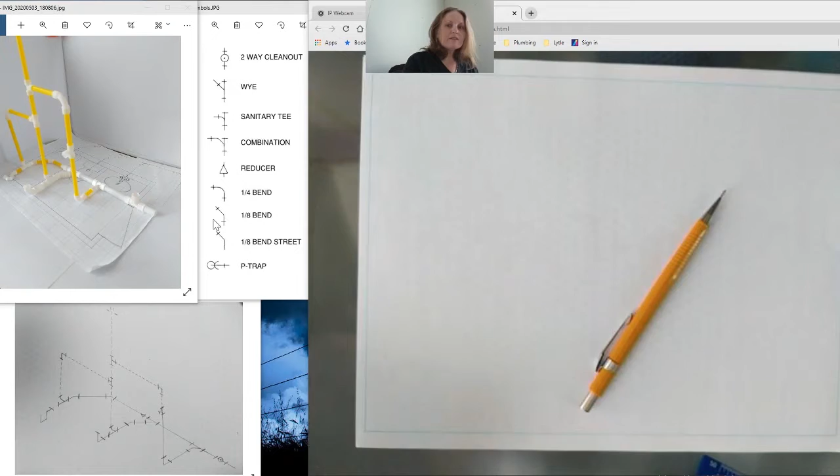And the cool part about that is they're drawn in the flat plan, but we can use them here on our isometric as well. And my isometric paper is here already. And how that makes it easy for us is with our plan in hand, we can see that the lines are in a different direction. They're slightly askew at 30 and 60 degrees, but that's okay, because then all we have to do is kind of rotate our paper, and then we know what we're going to draw.

So it looks pretty similar. So we'll rotate the first line, and then we'll just continue to rotate these branches another 30 degrees. And that's pretty much all there is to it. And then we'll just draw the vent risers in a vertical. So that's what I'm going to be sharing with you today. And you're going to be drawing it too.

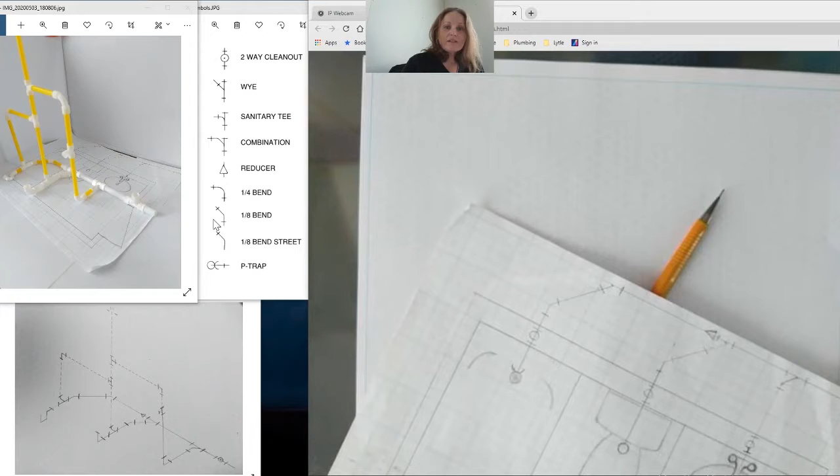So, like I did before, when we built the model, I'm going to speed it up a little bit so you don't get too bored. So I won't do a lot of talking while I draw it. And if your model's different, it's okay. And if you find that it's a little too complicated to draw what you have and you just want to draw what I have here on the screen, that's okay too. I don't mind. You can draw whatever. I want you to get the idea of how to draw it.

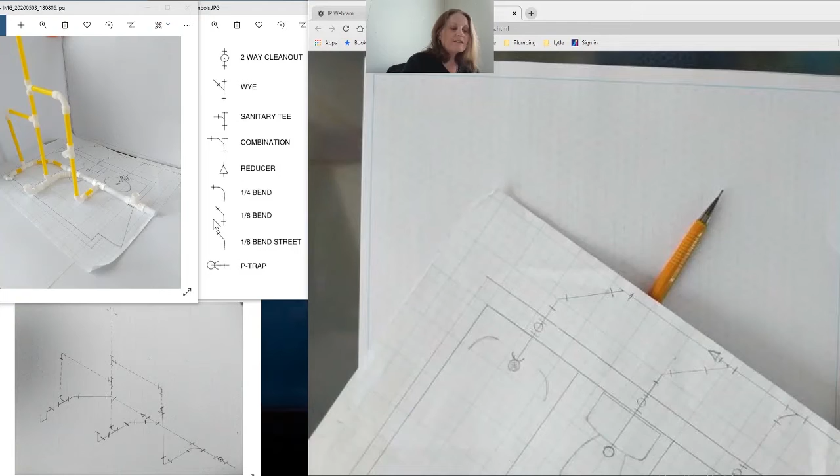So I have these on the screen here. So I'm going to go ahead and take this one out of the way. But I'm going to show you what you're going to do. Because we see this one here up on the screen is right here. This is the same drawing. So I'm going to start you out. First thing you're going to do is you're going to take your regular drawing and you're going to take a look at it and you're going to find your longest line. And then you're going to put your scale ruler on here.

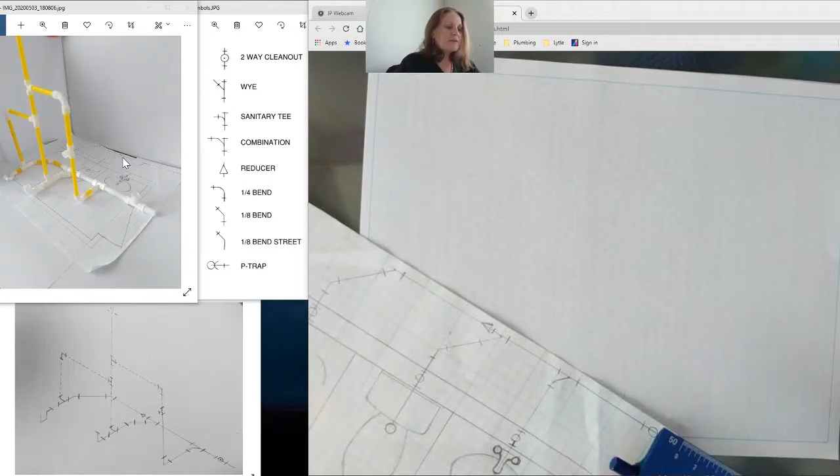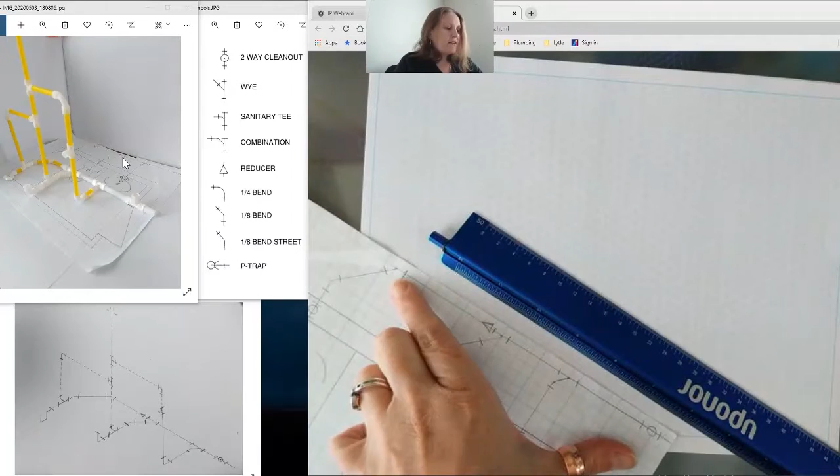Now, you're not measuring anything. This is a sketch. That's one of the key elements here. It's a sketch. So just pick a spot. And now I started from the corner. And you just start yourself out and find a spot. And you start the longest line and just, it looks about that long. And go for it. And you can see on my sketch there, it's just a rough line. So pick a spot, start from the corner, and leave yourself a little space so it doesn't run off the page. And just pick a spot and draw yourself a line.

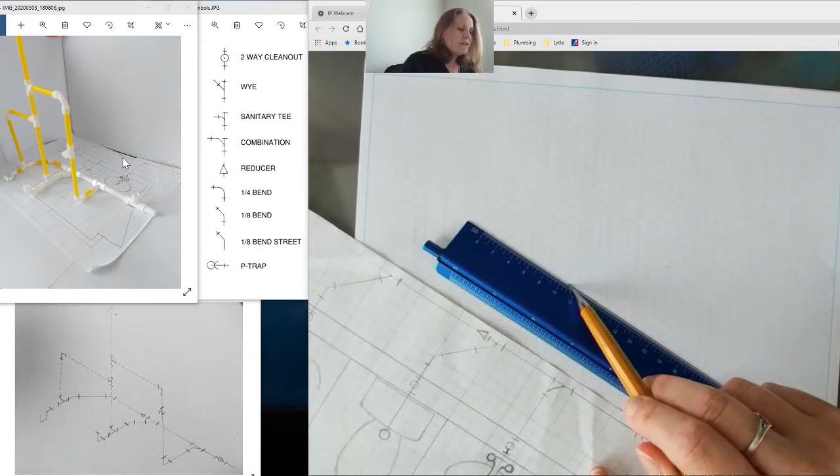And if you wanted to go that far, you can. Want to go a little further? Cool. Now I've got my main branch. So that lines up with this. And then you've got 3 off of it, but this one's got a little jog and this one's got the other turn. So what you do is you pick a spot for your first one, and then your second one, and then your third one. But it's got to go at a 45, and it's got to go to 45. So your safe bet is to start with your first one.

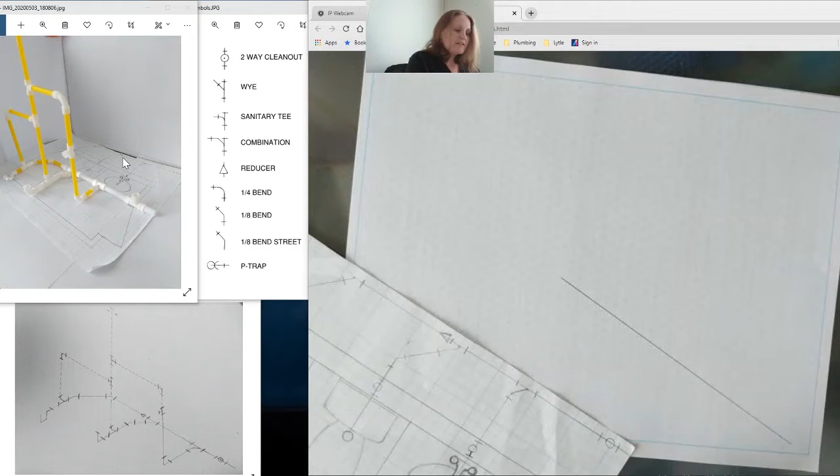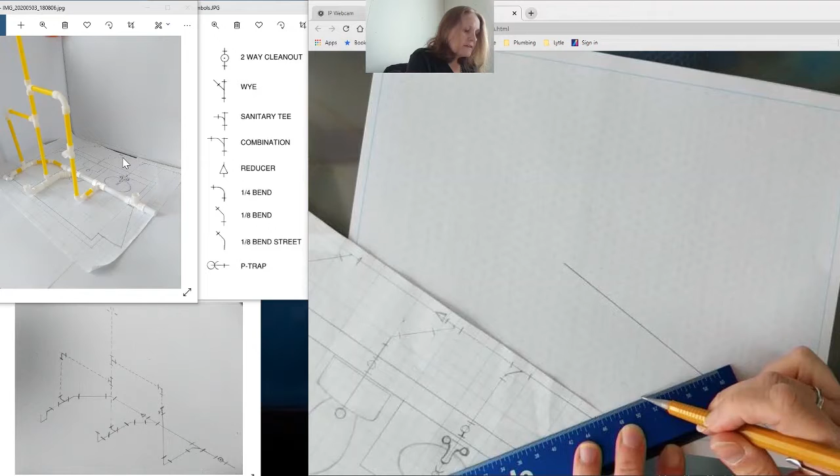So instead of going straight at it, remember I said we got to turn it. So it's already got the lines here for you. Just find you a spot, pick one, and it's your shortest one, and go right into it. So they're perpendicular here on this paper, just like they would be here. So it's your shortest one. Take it out there. That looks good. You want it to go that far, go that far. It's a sketch, guys. Do your thing.

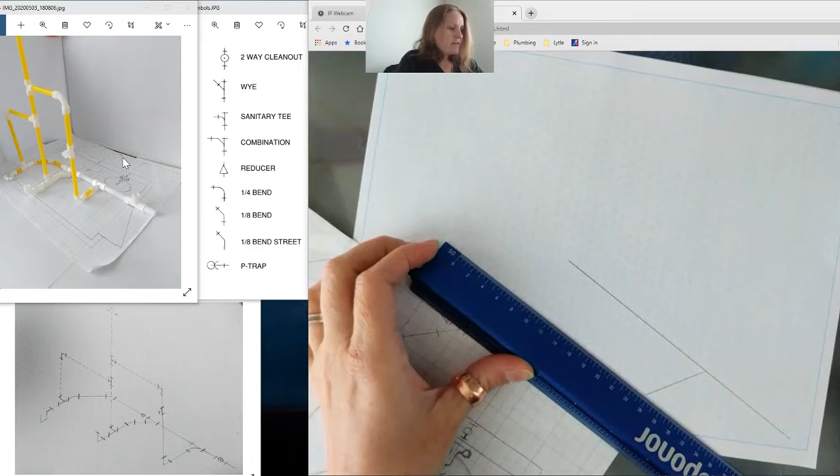Now your next one goes further by a little bit. So this is where your vent's going to be. So your other vent's going to line up with it here. Pretty cool, right? All the vents are going to be in line. This is where your wall is going to be. So we'll take the next one, if you wanted to, wherever you're going to make them.

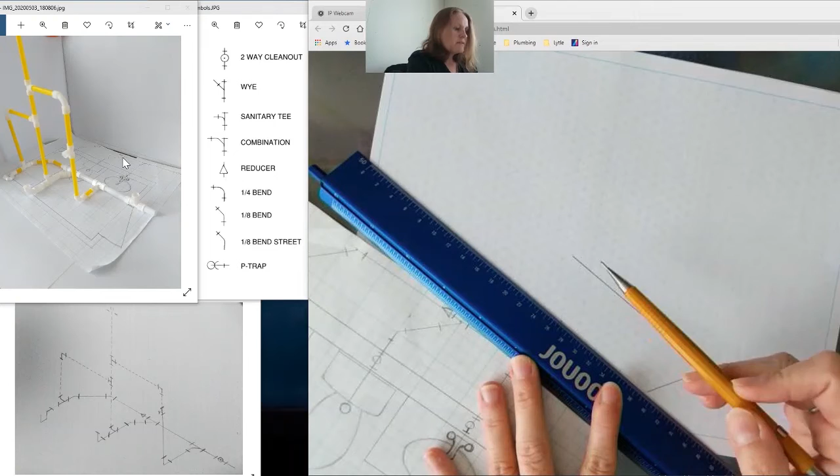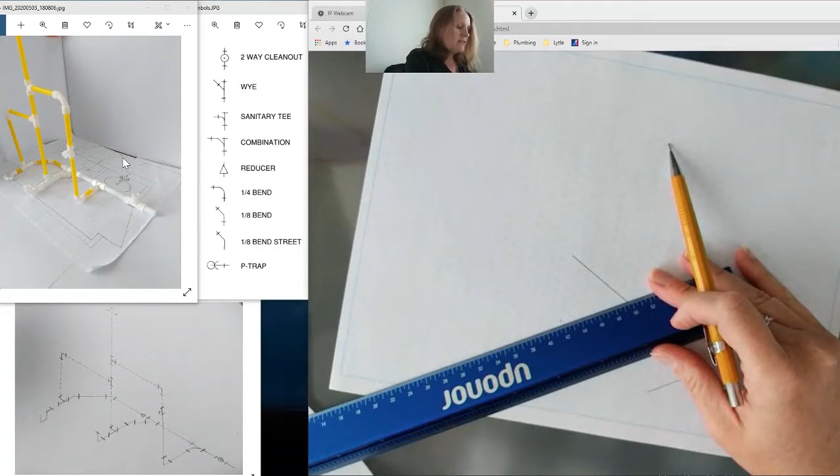So wherever your next one's going to be, say you want to do it here. You know your vent's going to be right there. And the next one's going to come off of this end here, but it'll be out further. Okay, so 45, we'll figure that out when we get there. We know the vent will go there. So that'll be where my line is. And I'll move my paper so I get the hang of it.

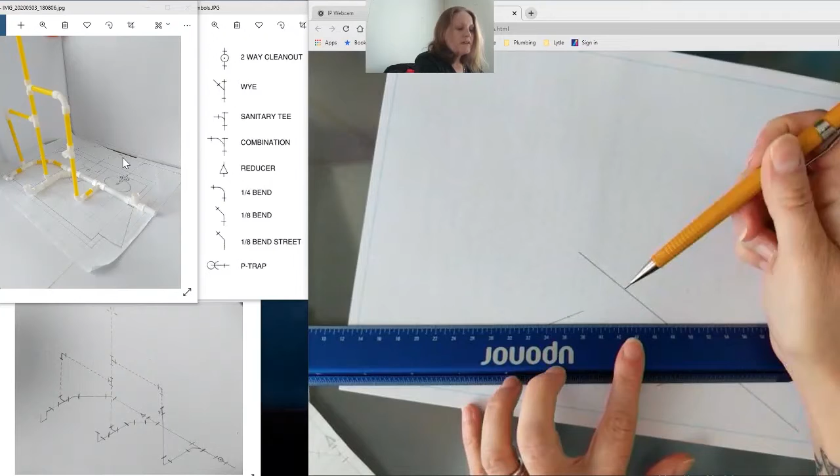And I left a gap because it's going to go at a 45. So pick a spot. Now to do a 45, you go from corner to corner to corner on these diamonds. So pick a spot on one of your diamonds, wherever you feel like it should be. And I'm going to take, so I got 1, 2, I'll go 3 diamonds this time. It's a sketch. I'm not going to do it like the other one just because I don't feel like it.

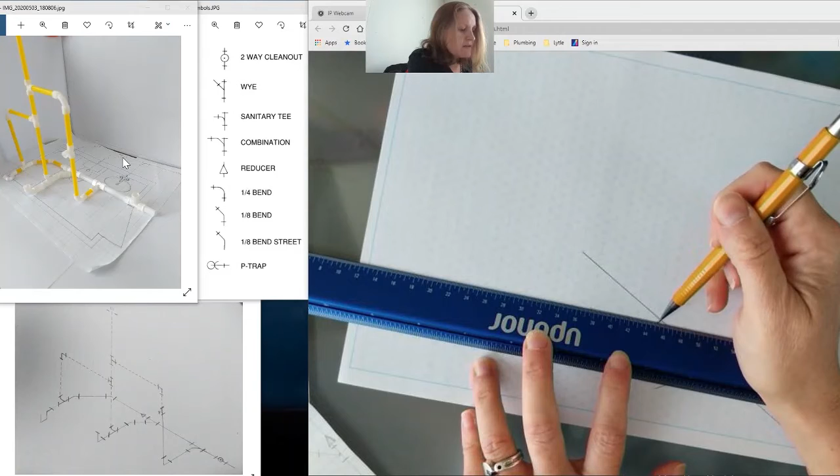So I'll pick this diamond and I'll go 1, 2, 3. There we go. That looks like a good 45. And it kind of goes straight. It's a straight board. I made a longer 45 this time. Cool. And you just connect it. It doesn't have to look like your model perfectly. It's a sketch. You're going to give them an idea what fittings they need.

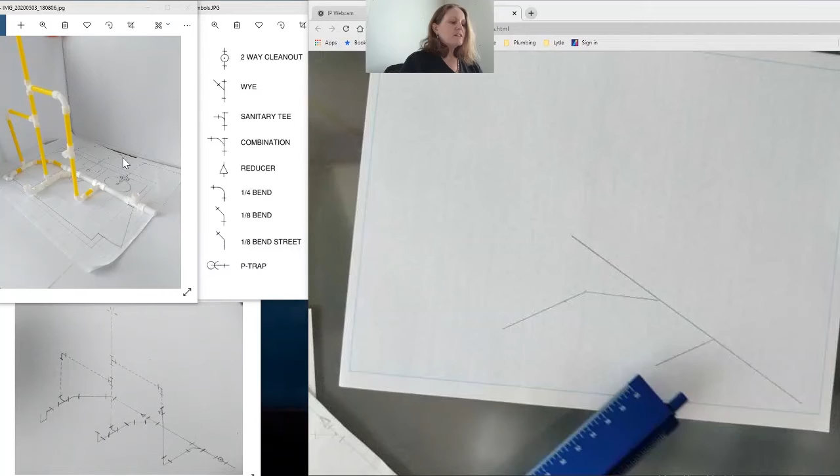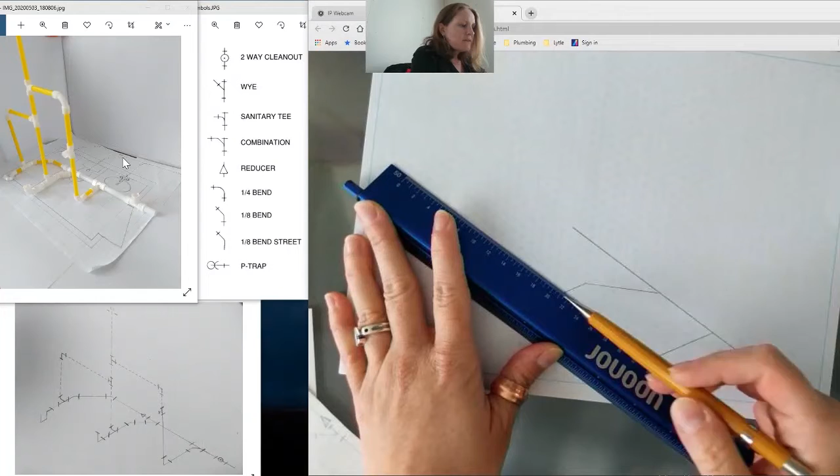That's all you're doing. Now to the next one, we have to get this wye in here. We need to know that the vent is going there. So wherever you want to put the line, the only thing that's important is making sure your vents are lined up. So figuring out the vent stays in line with this one, come down, and I'm going to pick this spot. That's where my vent's going to be, so the line's got to be in line there. So I'm going to put my line here, and it hits that spot.

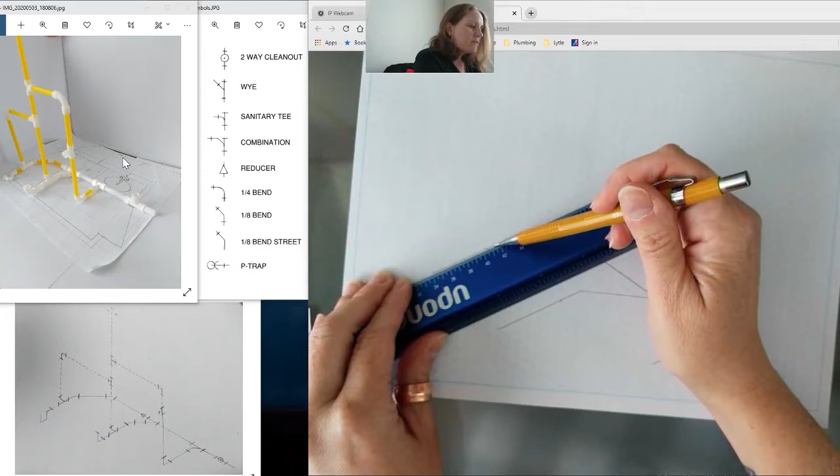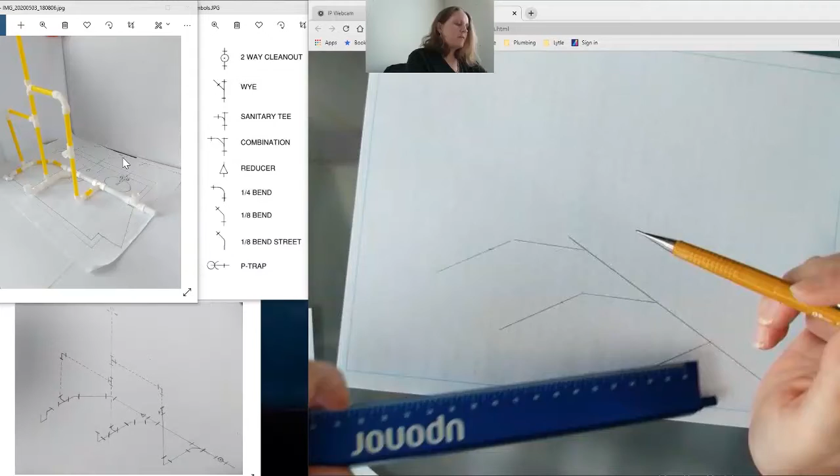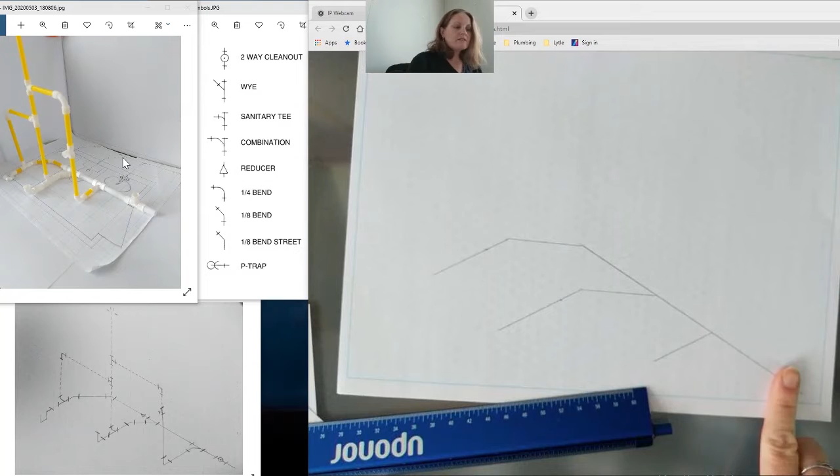And once again, a 45. And I'll go, that diamond looks good. There we go. Now I just gotta erase them. Now you got a plan view. So, you've got the first part of your plan. It looks just like your model. If you want to freehand the rest of it, you can. You don't have to use a scale ruler, but you want to get some of your parts in here.

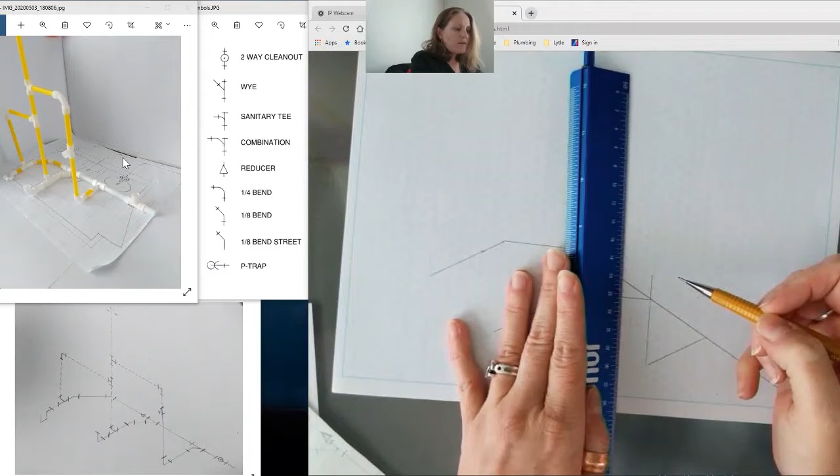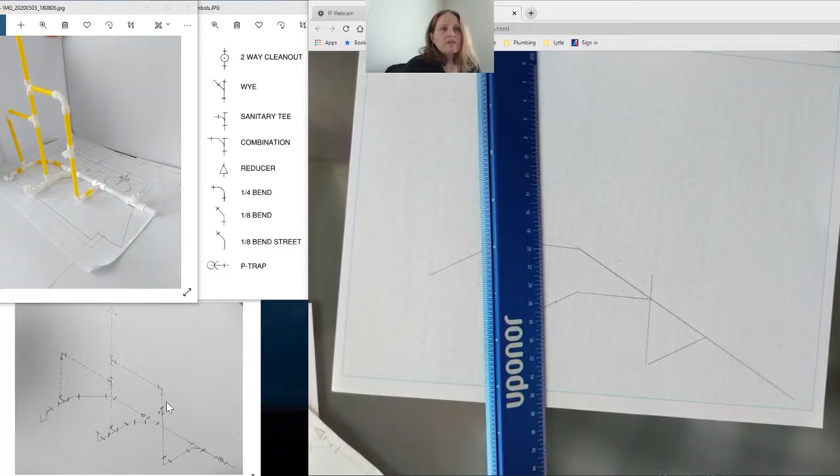So the next part is, you know it curves up. It goes up here, right? We're going to turn it up. So take it to the end and bring that one up. This is where your vent is. It's got a fitting here. So if you look up on here, this is your combination. We got that one right here. But the difference is here, this is a vent. Now, if you look at my model here, vents are dashed lines on an isometric. Gotta tell them it's a vent pipe, not a waste pipe.

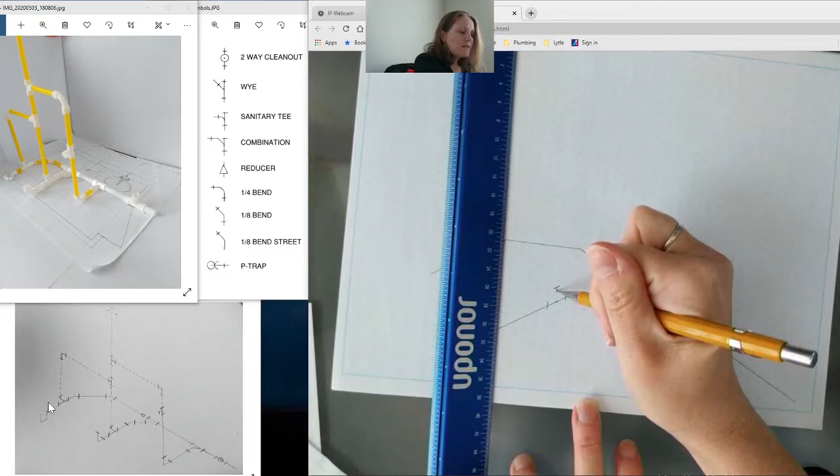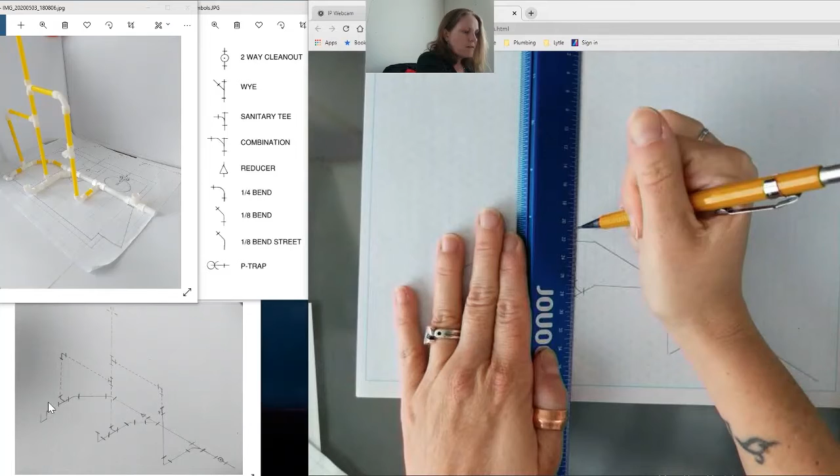So we can draw that fitting where that dot is. So where that dot is, it's going to go up to the fitting. So to do that, you're going to put a slash vertical, like in the picture, vertical. And then we know it's going up there. I'm going to draw one like an X across the line. And then you look at your combination, comes down. Remember what direction it faces. It goes there. So you basically kind of draw a crooked J. Real simple. And then it'll get dashed the rest of the way up. And this one's going to do the same thing over here.

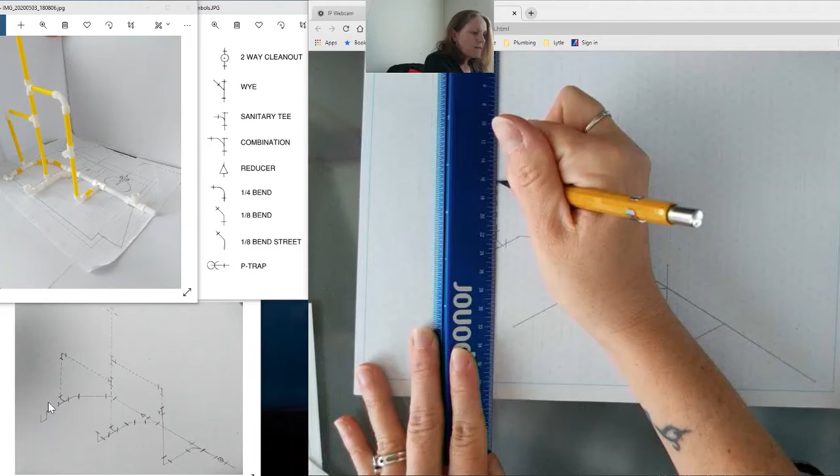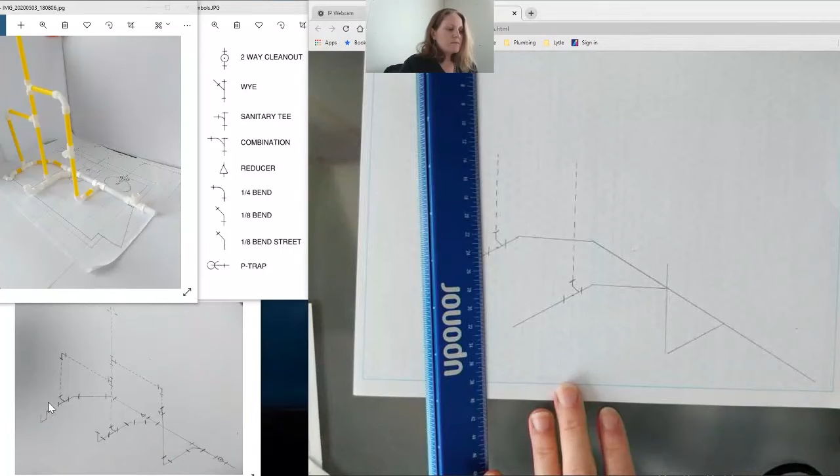Simple as that. Starting to look a little 3D. Now, you can see it curves up here, probably a little closer than we drew it. If you want to erase it, you can. You turn it up further. Water closets, it's usually turned up a little closer. So bring it back. Put that there. Another one of those little sticks on it. One here. Actually, I got that one the wrong direction.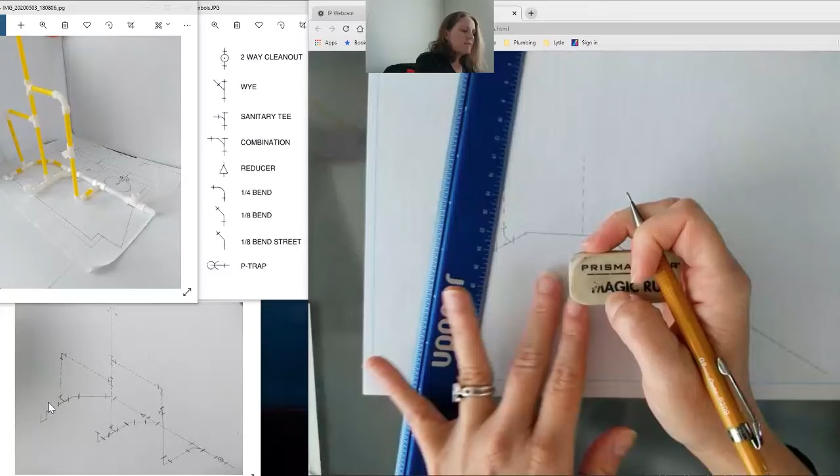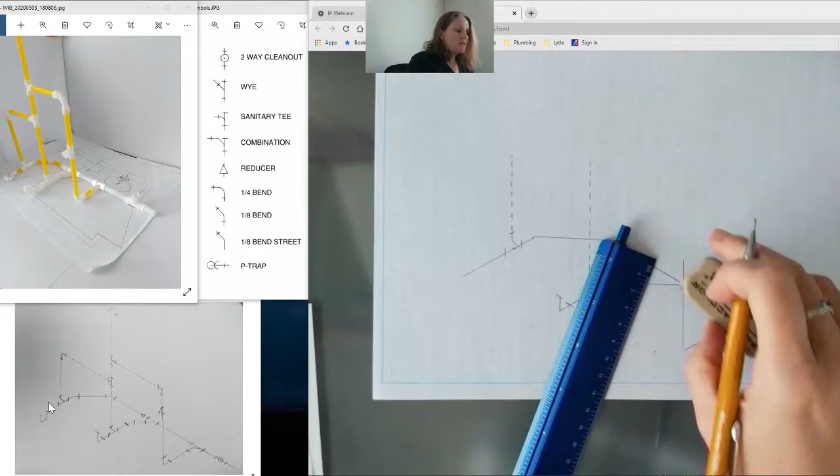Trace all that line on here. Bring that one out. Here. Put it back in there. There you go, the water closets, it turns up. You do the same thing for this one over here. Now, if you want to get creative, you can take these and curve them out. Make them nice curves. No requirement. A little harder.

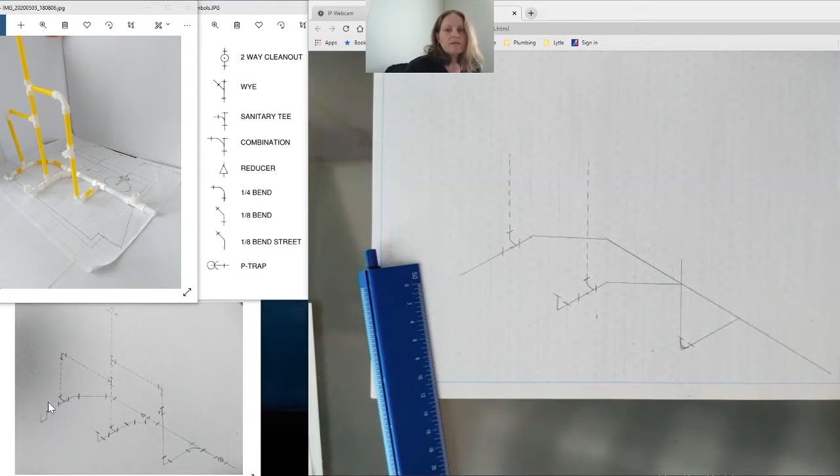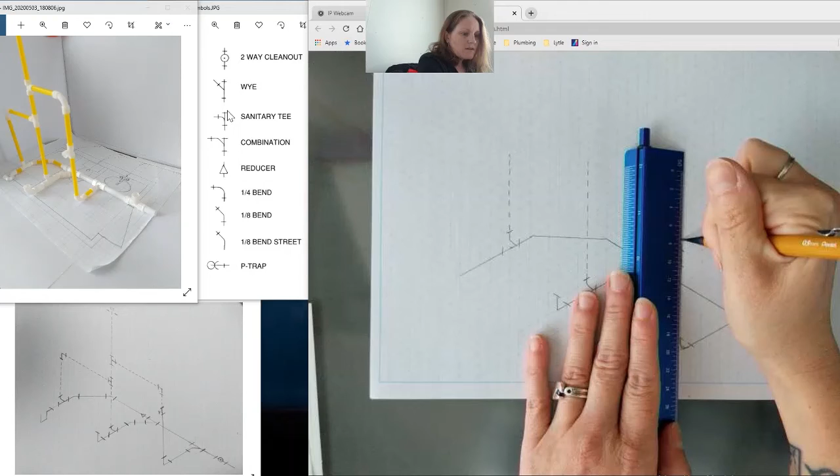And then you got your sanitary tee up here. We'll put that in. Bring it up a little higher. And you've got the sanitary tee up here on your chart. So that one is going to have your pieces going across. And it comes out facing. And that's right for this one, facing that direction. And then after that, it's going to be dashed because it's a vent. All right, there you go. So we have the base of that vent system.

Now for the rest of this, I'm just going to speed it up so you guys don't get too bored. And we'll put in all the rest of the fittings, okay? I'm not going to talk a whole lot. I'm going to get this drawn in here for you. Okay?

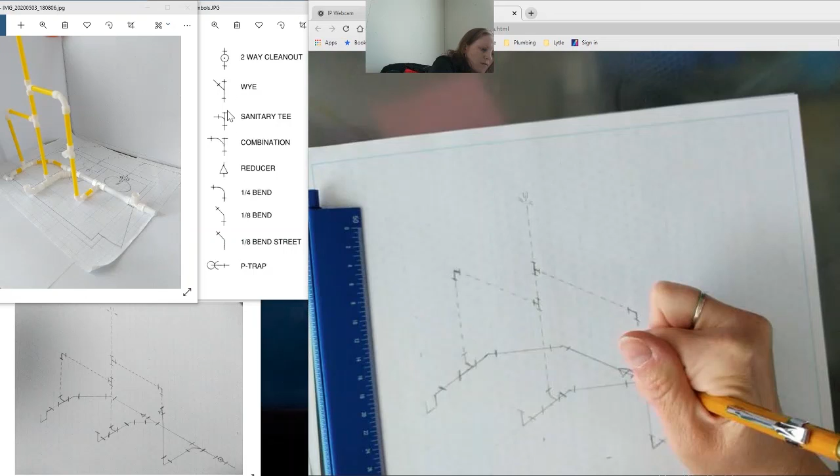Alright, guys. There you have it. Got one more thing to add. You're all set.